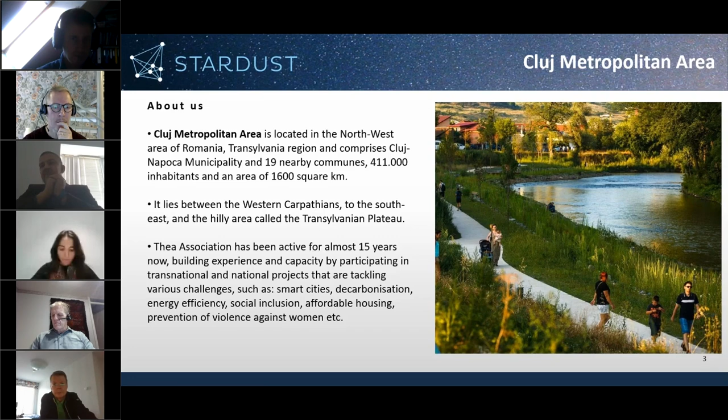We are active for about 15 years and are involved in all the strategies regarding the development of the metropolitan area, trying to coordinate the development of different municipalities and to make the projects work together. Today, I will present you our results regarding sustainable urban mobility, with a focus on the electrification of our public transportation network.

When we started this project in 2018, as I remember well, we were in Tampere and saw a few electric buses there. Back then in 2018, Cluj just ordered the first 11 electric buses. Meantime, in those 5 years, the whole area developed a lot.

Now we have a strategy to achieve 100% electric public transportation until 2026, and we have already invested 100 million euros in the electric public transportation fleet.

Until now, we use 41 electric buses, and my presentation will be about those electric buses. We also use 90 trolley buses and about 18 electric trams. Our availability of electric buses is about 90 to 93%.

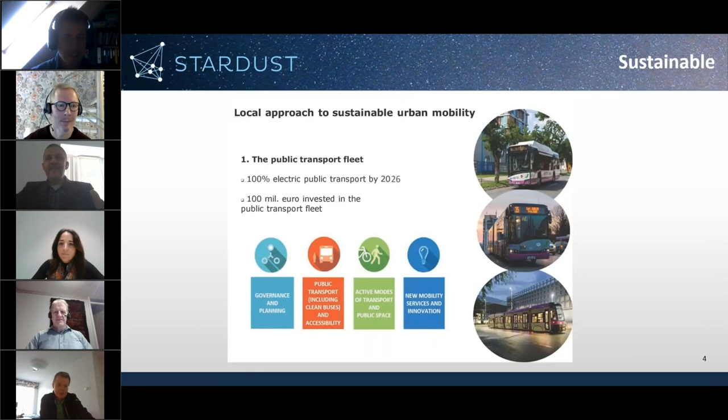Zoltan, I think we lost your slides. I have full screen. I see my slide. You didn't see? It disappeared a few minutes ago. I changed nothing, because the moderator allowed me at the beginning to show my presentation. Okay, it's back. It's back. Yes. I think somebody must have pressed the wrong button. It's just come back now. Okay, so we were here somewhere. Yes. Okay. Thank you.

One of the other issues is that the sustainable urban mobility planning makes just recommendations for the projects. We as the Metropolitan Association are responsible for the urban mobility planning, but we can make just recommendations. The projects and the implementations are the responsibility of the Cluj municipality, and they act in the directions we are foreseeing, but the speed of implementing the projects is not as fast as we assumed in the urban mobility planning.

The biggest challenge from my point of view, because I am working with all the companies, all the entities, and the whole infrastructure, is the energy requirements for the charging stations. In some specific hours, when the buses are returning to the charging stations after the rush hours, the energy infrastructure can't deliver enough energy for all the fast charging stations. That's why the next 6 fast charging stations will be combined with a new energy network, so we don't have this problem and can fully charge the buses very quickly.

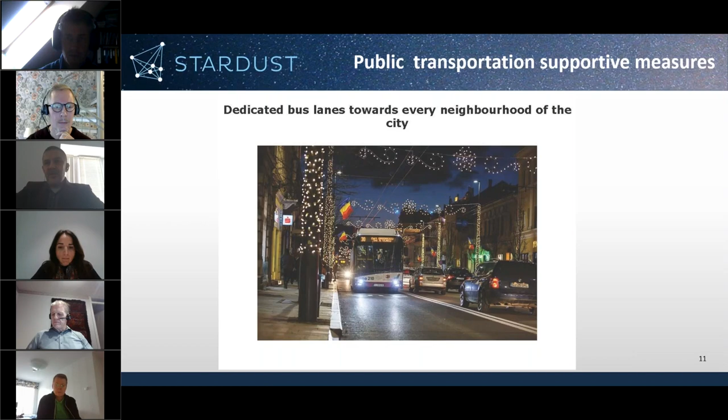At the same time, we are also running different other projects regarding the infrastructure and communication to the population about the usage of electric transportation. We have dedicated lanes toward the old city and the whole city. These lanes increased the battery life and the autonomy of the buses by about 10%, because they are not staying so much in traffic, just using electricity for heating or air conditioning.

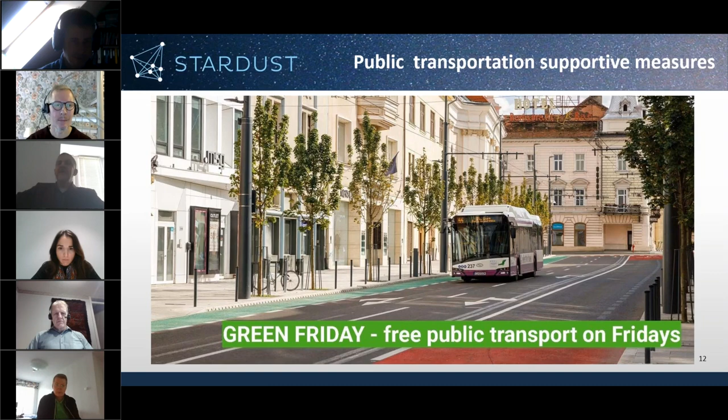Until last year just at the municipality level, but from last year also in the metropolitan area, we have so-called Green Fridays, when the whole public transportation in the metropolitan area is free for every passenger. We have some smaller projects like health tickets. We have one ticket station where if you do 20 knee bends in front of the camera, you get a free ride, a free ticket, 1 ticket per day per person. A lot of people are using it, and the population was very happy about this initiative.

Also, we have free public transportation for retired people, pupils and students, and we have dedicated school buses, which now are internal combustion buses, but we try in the near future to change those buses to the electric fleet as well. Thank you.

That was very good. Very short. Yes.

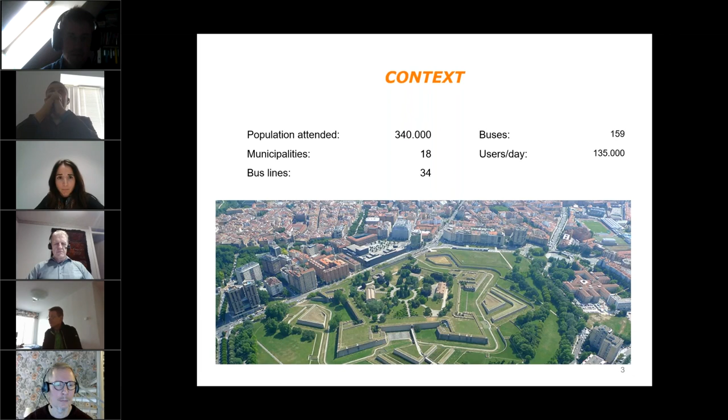So again, we started this pilot in 2018 together with the Mancomunidad. The first thing was to choose, among all the lines we were running, which one would be more suitable. The Mancomunidad actually chose one of the lines that is very eccentric. It crosses the city more or less through the center, which is line 9. It's a line that goes from a rail station to a university, which is quite crowded at peak hours.

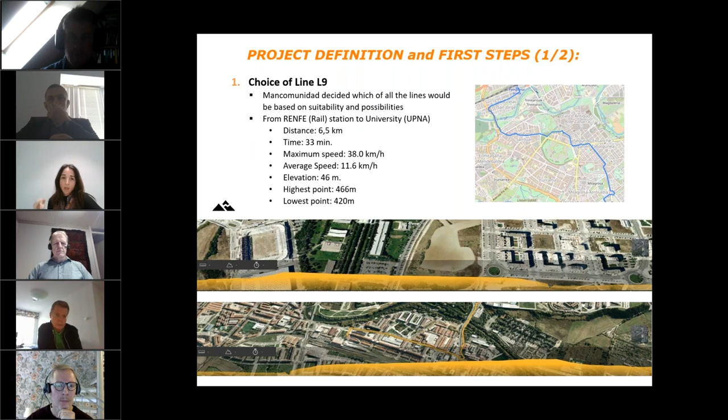It has a distance of 6.5 kilometers, average time around half an hour, and it can reach a maximum speed of around 38 kilometers per hour and an average speed of not even 12 kilometers per hour. And it has an elevation difference of 46 meters. All these are important parameters, of course, for setting the fast charging system.

The first thing we had to do was to launch an internal tender to select the suppliers for the solution. That means the vehicle, plus the charging points, in this case the pantographs, plus the full maintenance of both the charging points and the vehicle. The choice at that time was fast charging, because in 2018 we could not find in the market a slow charging mechanism that could keep the bus in 16 hours of continued service, which was needed for the KPIs of our contract with the municipality. So we had to go for fast charging.

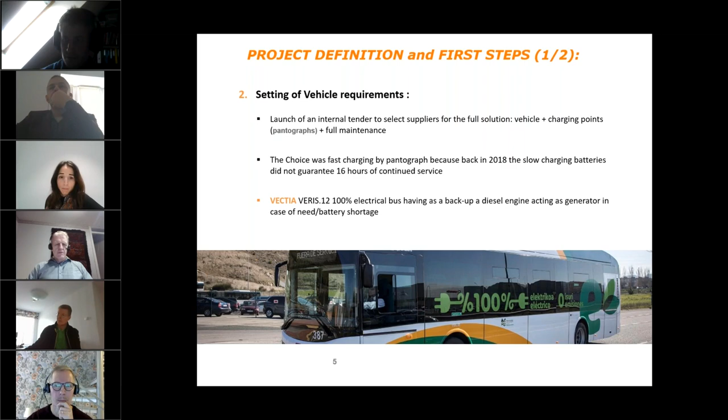The winner of the tender was Vectia, which had a 100% electric bus with a backup diesel engine that worked as a generator in case of a battery problem or shortage. The main parameters, very schematic: what were the key things we had to put in that tender for the suppliers? It was based, of course, on what the market could offer, but also on the line 9 specifics.

So we had a maximum charging time of 3.5 minutes, minimum autonomy of 8-9 kilometers, a bit more than one way, but in the end it could reach almost 10. We could even do both ways, but our requirement was at least 8-9. And then, of course, the number of charging points. It was needed to have one at both ends of the line.

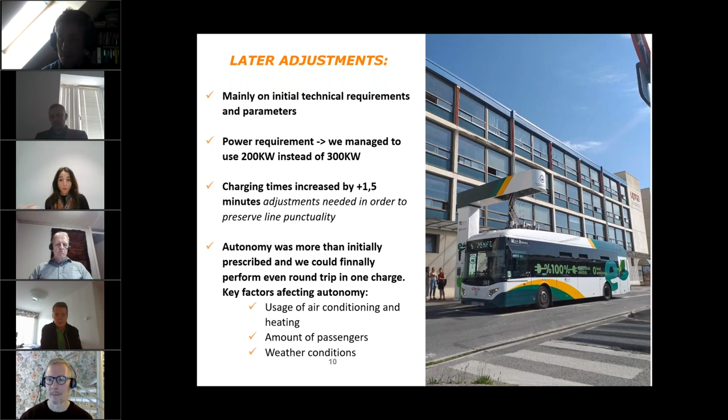So mainly on the technical parameters, instead of 300 kilowatts, we used 200. The charging time actually increased by 1.5 minutes, so it was longer, which sometimes could endanger our punctuality. And the autonomy was more than initially prescribed, so in the end we could actually perform the two-way trip, as I said before.

And in 2022, we started with compressed natural gas of renewable origin. And this year, we started with slow charging for a lot of 20 buses in the network.

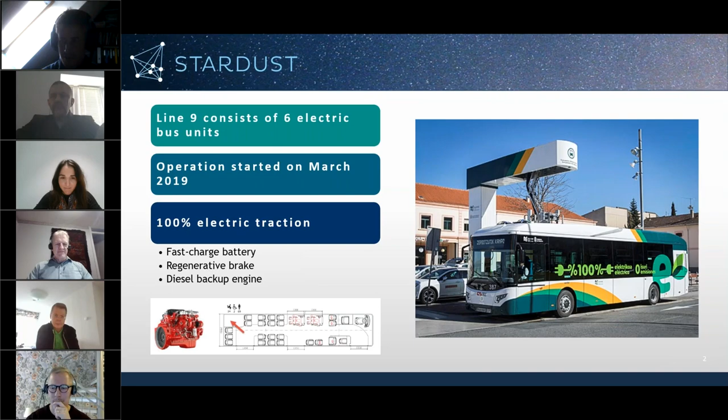As Julia told us, it's 100% electric traction using the regenerative brake, with a backup diesel engine for emergency purposes. There are moderate slopes in this 6 kilometer route of the bus. Our task here was to gather all these different sources of information, the main one from the monitoring system on board the bus, but also other information that the operator sent via CSV files, and different types of data needed to be coordinated, with different granularities and so on.

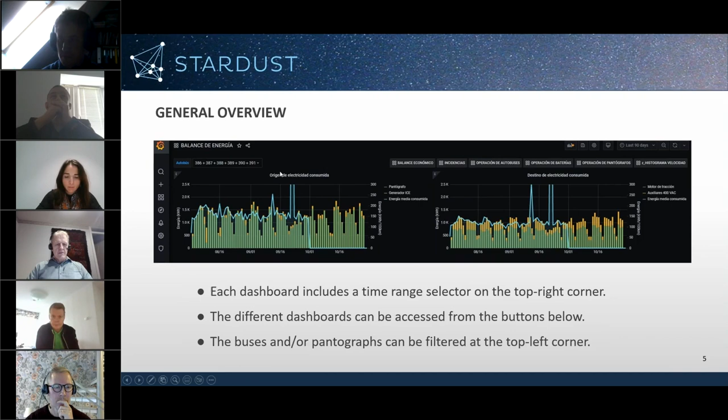So this was the end result, where you can easily change the time frame you want for the consultation, the different screens you have, the 6 units of buses. You can see the information aggregated or unit by unit. Some other information is shown in tables, like the incidences of buses and pantographs. And these are the main screens where all the data is joined and shown.

Energy balance, economic balance, the incidents, everyday events, the operation of the buses, all the details about distance, time, and so on. Battery operation, which was one of the main concerns for us to verify that it worked as expected, and the operation of the pantographs.

Sorry, I'm seeing the little screen.

So these are some examples of how the information is depicted. Here we can see the breakdown of the energy sources. For instance, with the time of the operation of the pantograph, all data can be easily exported if you want to work with it in some other different platform. This information, for instance, is with a breakdown per bus, so you can see all of them together or one by one. And other figures, for instance, can show the average consumption per 100 kilometers and so on.

So we had to interpret all the data, make some calculations, and try to show everything in the easiest way for the operator and for the municipality to get the conclusions and to see that this electric bus line was working as expected.

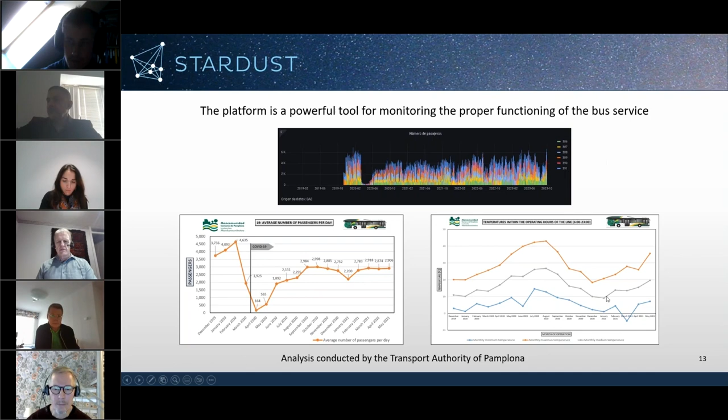And last of my presentation is this one about the battery. The battery was dimensioned to operate normally in a journey using 20% of the state of charge. As Julia said, during weekends where one of the charging stations is not operating, the bus is able to do the 2 routes with just one charge, like this one.

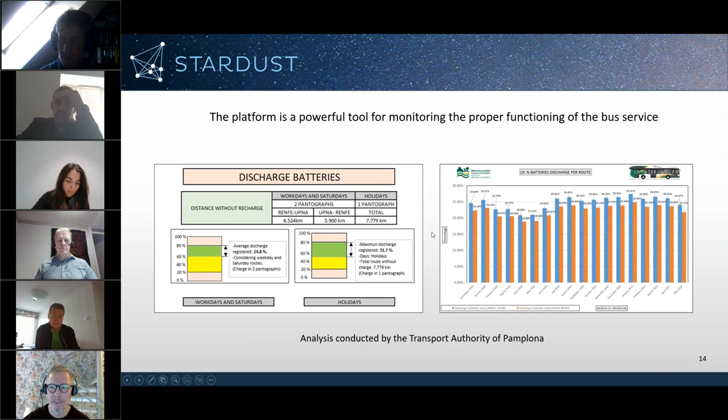And this is an example of a figure where they calculate how much the battery discharges in a normal route, going and return. One is the blue, and the other is orange, and on average it's between 20 and 25% as expected. So it's working well, and I think they are taking valuable information from this monitoring platform. And this is it. I think I did it more or less in the time.

It was very interesting content. Thank you. If you did something in a hurry, we really didn't see it. At least I didn't. So okay.

You obviously have collected a lot of useful information, and I suppose this collection in some form continues. Yeah, of course. This is a live experience, a live platform, and it's working well. We're continuing with the maintenance, so they can use it every day.

Very good. Our European round trip, thank you, Pamplona, continues towards Nordic countries, to Tampere in Finland, where Marko Paakkinen and Seppo Rantala are describing the results and conclusions from the Tampere electric bus experiment. Marko is a senior scientist at VTT working in the electromobility team, and his current research interests include vehicle charging, especially at megawatt level, and how the techno-economic implementation can be carried out. And to save time, I think we let Marko take the floor.

First, the traction energy use. The road surface has a big effect on the rolling resistance. Thinking about the vehicle driving resistances, the air resistance is not a very big effect in urban environment, but the rolling resistance, especially slush, seems to be very much the biggest affecting factor. So slush, water, snow on the road surface, it increases the traction energy use.

Another factor is the bus load, so the number of passengers. There can be seasonal variation, like in bad weather, people tend to take the bus rather than walk or take the bicycle. So that can further increase the energy use in severe weather. And the low temperature in itself is actually affecting the battery capacity, how much energy you get out of the battery. So you need to have a proper thermal management in the battery.

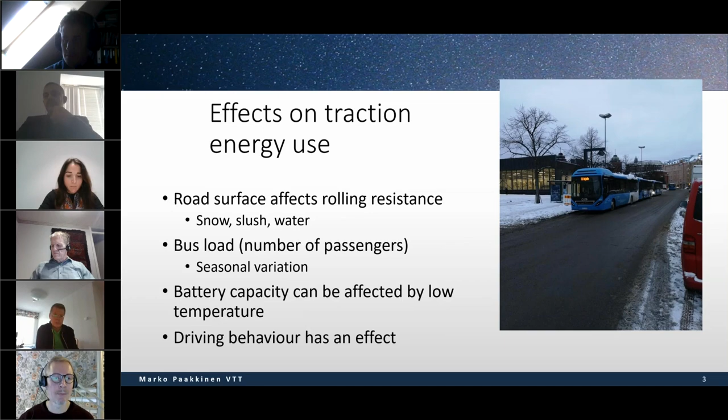But one effect that actually is quite important, but which can only be affected by proper training, is the driving behavior. The driver actually can affect a lot the bus energy consumption. The cabin heating is another factor that has a big impact in the Nordic conditions when we are going to -15, -20 degrees Celsius. So the heating needs, of course, increase dramatically.

In Tampere, there was a hybrid heating system in the buses, which included a fuel heater combined with an electric heater, and the operation was adjusted over time. Initially, the operator was able to choose which heating system they prefer, but then the operators tended to pick the fuel heater. So that was later changed, so that it will only start at -15 degrees to save the battery energy, because with the resistive heater, the consumption increases quite much when the temperature goes down.

The modern buses typically have heat pumps, but typically these also will need supplemental resistive or fuel heaters in very low temperatures, because then the heat pump COP value goes too low to effectively produce enough heat to heat the cabin.

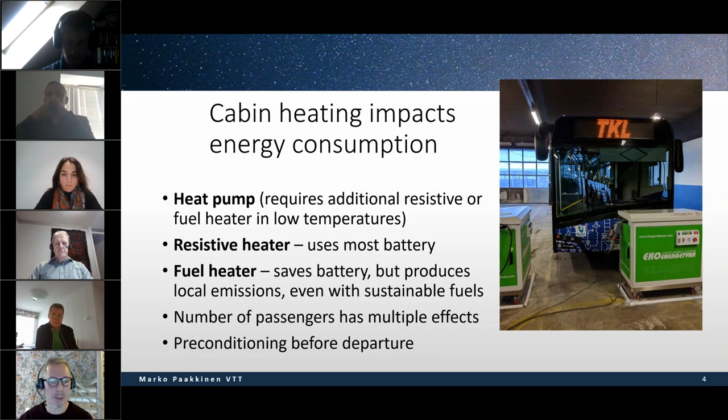And the number of passengers here has multiple effects. So the more passengers you have, the more heat produced by the passengers you have, but then also more door openings you have that will dissipate the heat. So that's also an interesting aspect here. And one thing that very greatly affects this cabin energy consumption is preconditioning the buses before departure. So that was done in the Tampere pilot at the depots.

Charging is heavily affected too. Cold batteries can slow down at least the initial opportunity charging before the battery has heated up. So battery preheating also helps here. Additional energy consumption in the winter means also longer charging times if the system is sized so that you will need many charging sessions over the time.

But one thing that is shown in this picture here is that the weather conditions also pose interesting challenges, like snow buildup on charging points. This was causing issues in Tampere with the pantograph charging when there were ridges of snow that accumulated on the driving tracks, and that was causing misalignment with the pantograph and the opposing part in the mast.

And to overcome this, the city of Tampere actually installed a heating system to melt the snow around the charging point. And one other thing they needed to do was to reinforce the ground, because always driving very accurately the same tracks led to the ground not supporting enough, so that needed reinforcement too. So the charging point construction to withstand the climate is important, especially in opportunity charging.

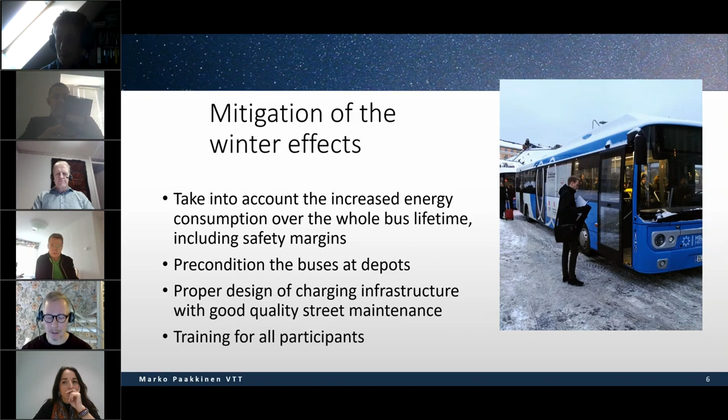So that was my very quick summary, and I'll let Seppo tell you more about the numbers now.

Thank you. Yes, thank you, Seppo. While you are setting up the slide set...

Just some basic information: you are a senior scientist at VTT, with over 30 years of experience in data analysis, software engineering, and has designed several software systems and signal analysis algorithms with MATLAB, Simulink, LabVIEW, etc.

But now we will hear how Seppo has been collecting the data and making conclusions out of them. So whenever, Seppo, you feel available, please start your presentation.

Thank you. Can you see my presentation? Only black. We seem to see something because we see the icons on the lower part of the screen, but the presentation itself is totally black. Okay, it is wrong.

For the rest of the audience, just an information, at least I am more familiar with Zoom or Teams, so some practicalities with this GoToWebinar are lacking from my side at least.

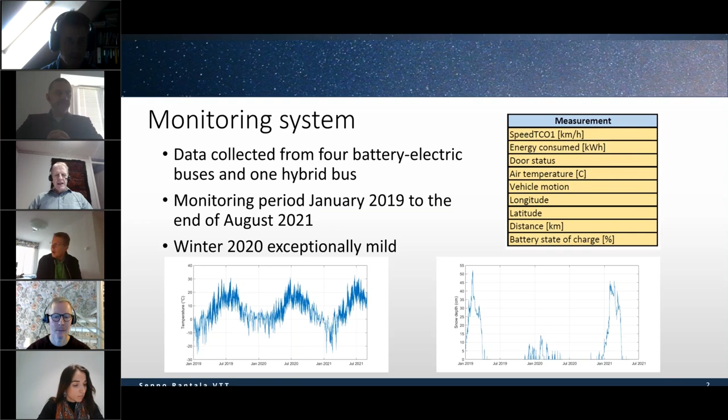I will first tell some background information. And can you squeeze it in 5 minutes? Okay, yeah, thanks. As Marko told, there were 4 battery electric buses and 1 hybrid bus, but only the analysis was done for the battery electric buses.

And unfortunately, there was only some information available. So there was no information about the distribution of energy consumed, like how much energy is going to the traction motor and other parts. But if we think about the system as a whole, it matters how much battery energy is available. And also there was no information about the number of passengers.

So I have used the door status for estimating how many people are, or how much traffic is going through the doors. So those are the values which are used for the analysis.

And the monitoring period started in 2018, but there were some problems with the data, so the actual period started in 2019 and ended in August 2021.

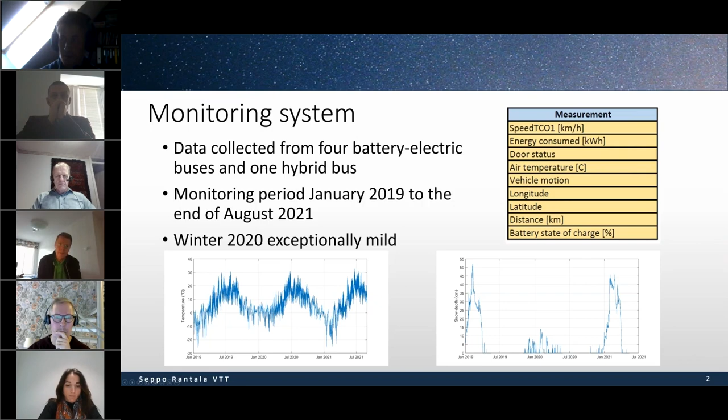The analysis line was rather short, and it was in the center of the city, so there were different kinds of situations. Unfortunately there were some changes to the road since Tampere was building a tram that day, and also if I think about the analysis of results, COVID decreased the number of passengers, so it's not possible to compare some data.

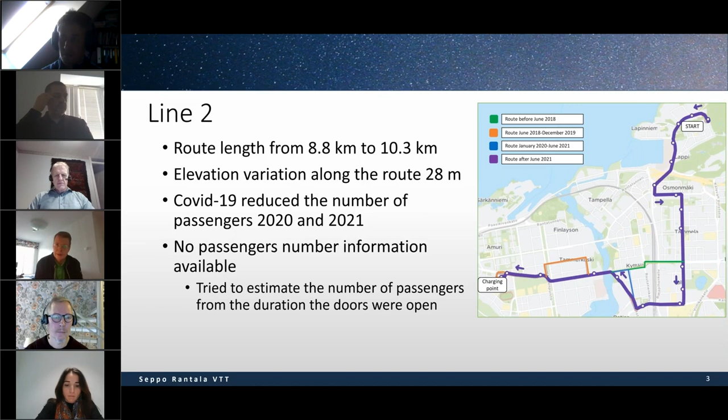But we got some interesting results.

Here is the energy consumption for all the data collected from all those electric buses. As you can see, the minimum is near 15 degrees Celsius, and also the variance is rather small above that.

Interesting is that the variance is very large when the temperature is near 0 degrees, and from this it is possible to see that there is much variation also for very cold temperatures.

And as Marko told, there were some changes during the monitoring period for cabin heating, and that of course changed some results.

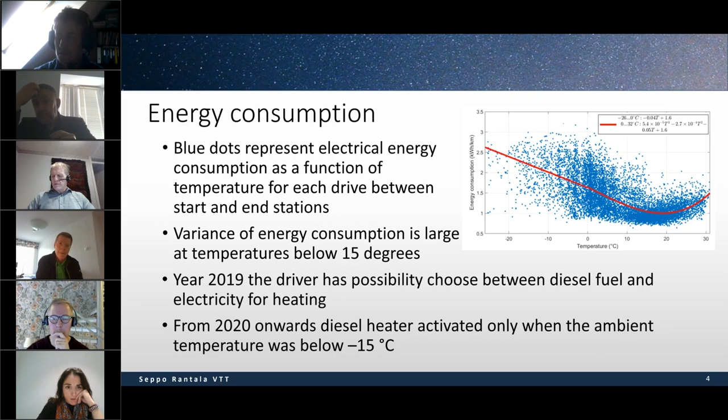Okay, can you go forward? Yeah, and from the previous slide, it is possible to see that there were two outlier groups. The first one was high consumption near 0 degrees, and it seems that, as Marko told, slush or slippery roads can increase the consumption very much.

Also, in that kind of weather, there are much more people using public transport, and it was possible to see that the doors were open much more than on some other days.